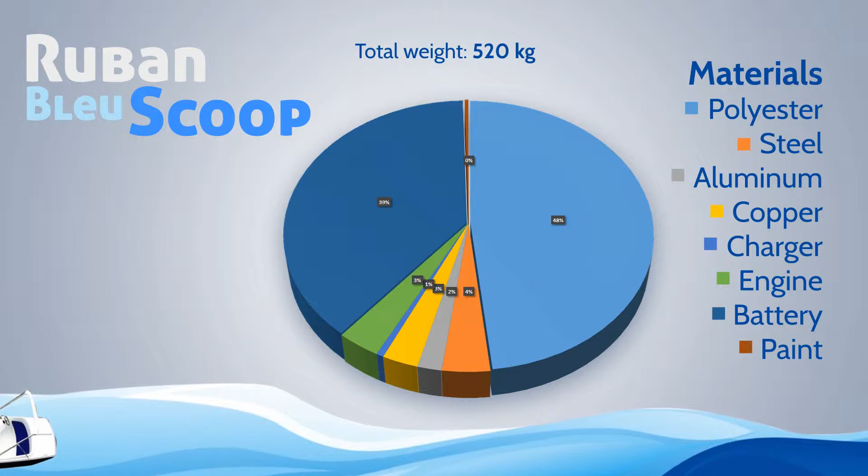Okay, we hope you understand the principle now. We'll come back to it later. Design an environmentally sustainable, motorized, water recreation product / offering using layered object manufacturing or 3D printing as the main production method. So, let's start with our vision.

We want the boat to be suitable for inland waterways. It must have a low EVR. Must be suitable for a rental service. Use of natural materials. Sustainable energy. Also, the production method needs to be sustainable. And the design should be most advanced, yet acceptable.

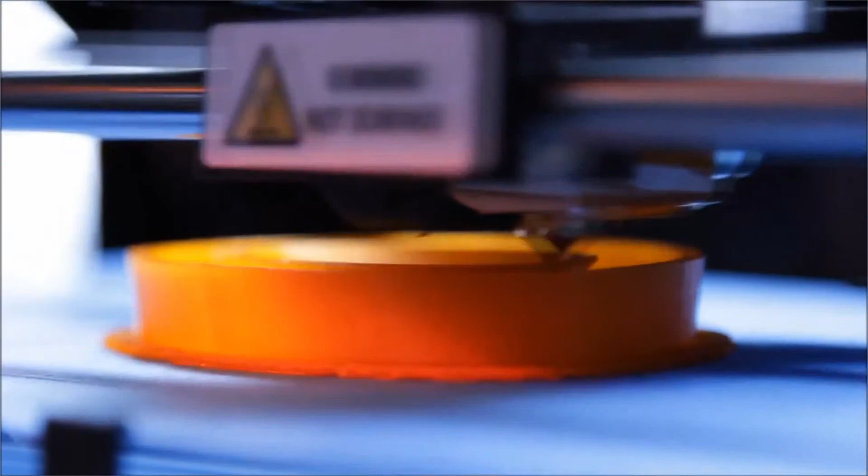Additive manufacturing. Most of you already heard about it. It includes several different production methods that allow three-dimensional complex shapes to be manufactured. Objects are created layer by layer. This opens up possibilities that are impossible to manufacture with traditional methods. As you can see in the movie, the shape is created layer by layer.

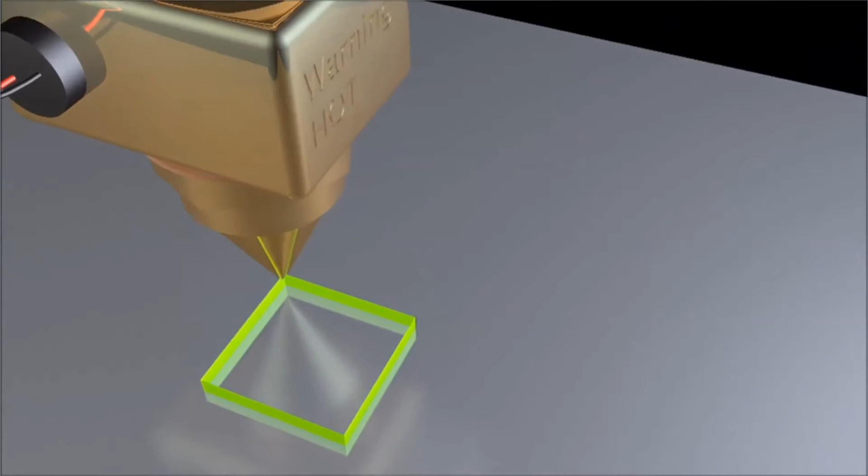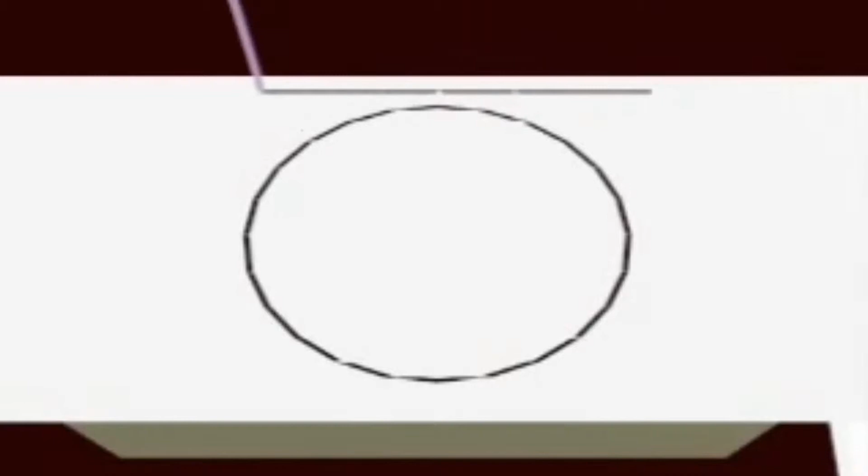The most well-known 3D printing method is fused deposition modeling, also known as FDM. A completely different form of additive manufacturing is layered object manufacturing, also known as LOM. Layers of certain material, for example wood or paper, are glued on top of each other and then cut into shape. In order to choose the right manufacturing process, the processes will battle.

May the lowest EVR win. In the red corner we have layered object manufacturing, and in the blue corner we have 3D printing. Fight! So we use the life cycle analysis in order to determine the eco-costs. We've looked at the materials, the production method, and the waste.

We have done this for 3 different 3D printable materials: ABS, PET, and TPS. As you can see, the highest eco-costs are in the production phase. This is because of the high energy requirements that are needed to melt the plastics.

For LOM, we have looked at 5 different types of wood: bamboo, European oak, birch, hickory, and American oak. As you can see, the values of 3D printing are about 25 times as high as the values for LOM.

So we have a winner! 3D printing is knocked out. LOM wins. Okay, let's go back to the EVR model.

Now we know the eco-costs. We still need to know which type of wood has the highest value. For this, we made a survey. We asked people to rank the wood, without knowing the type of wood, from lowest to highest value. We will give you 5 seconds to do that for yourselves. Okay, the time starts now.

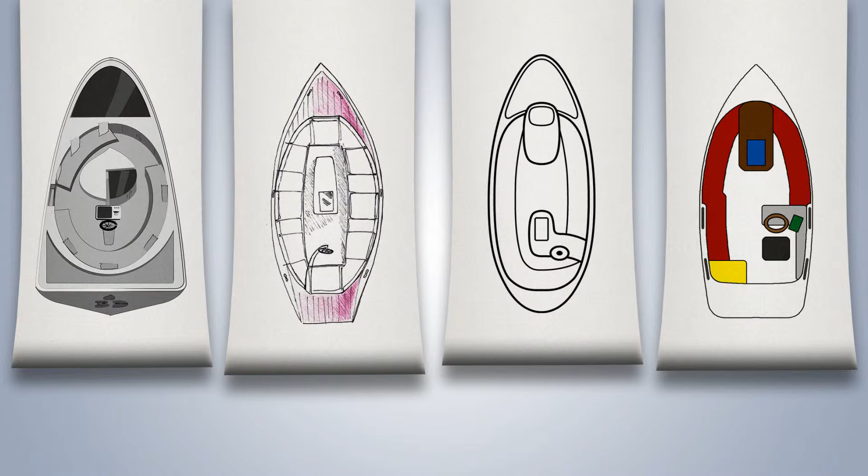Now the material is chosen, it is time for the boat design. The team members came with 4 individual concepts. By combining these concepts, the boat could be designed.

In order to decide the size, the team started to measure and lay out a top view design, until it could comfortably hold 6 to 7 passengers. The boat is 1.2 meters high, 5.5 meters long, and has a width of 2.4 meters.

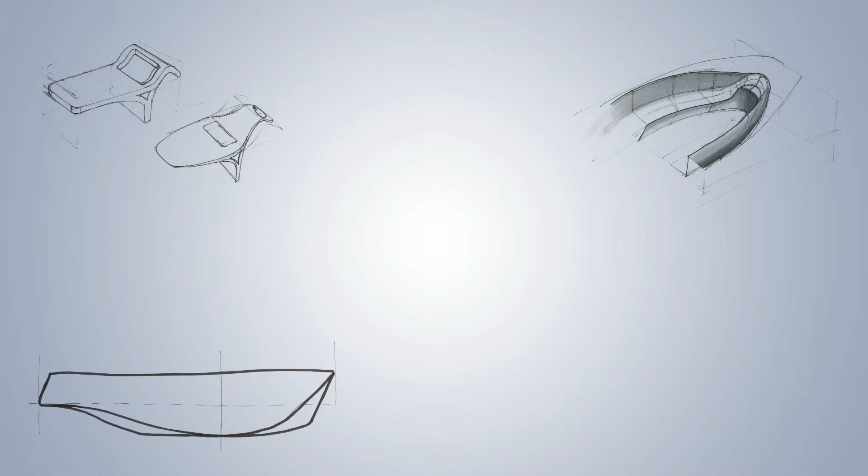When the final sizing was determined, the individual boat parts were designed. The table, the passenger and driver seats, the hull shape, the steering wheel, and the total boat shape were molded and shaped until everyone was satisfied and one final boat concept was given birth.

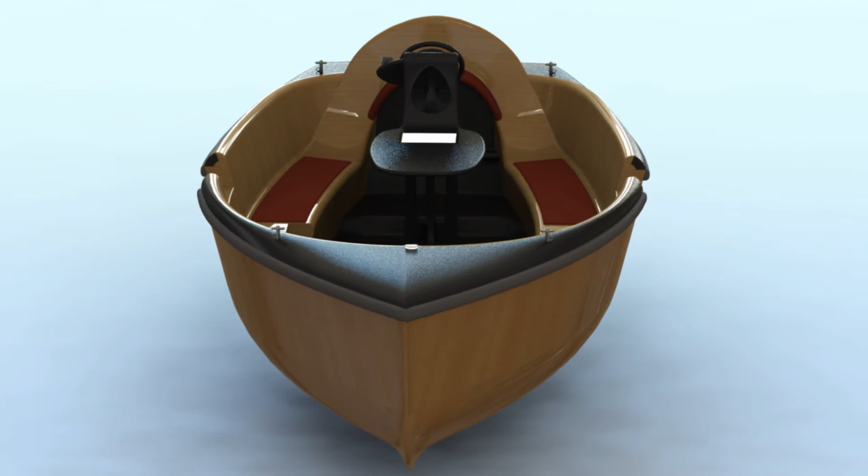The GPS on board will make sure you never get lost. Maybe you are still wondering what makes our boat better than the others.

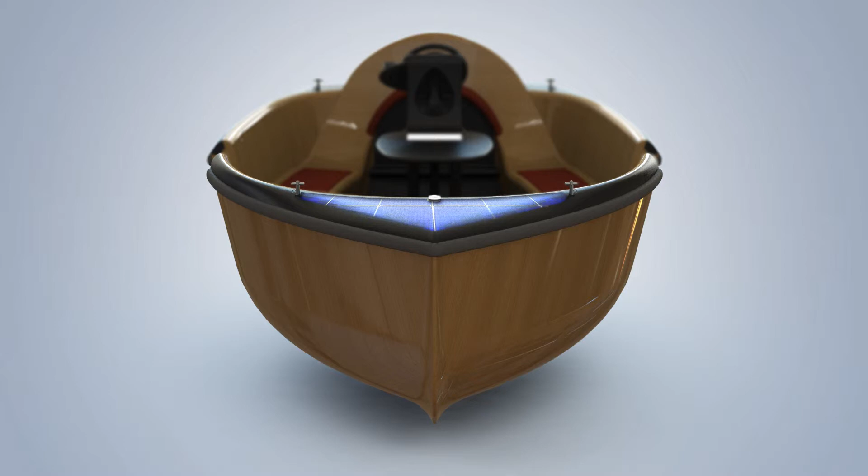For the value, we also did a survey. We asked what people are willing to pay for the boat. What would you pay? 10,000? 15,000? 20,000? These are just some values, but from the survey we found out that people are willing to pay this amount. This means that the total EVR of the boat is 0.1.

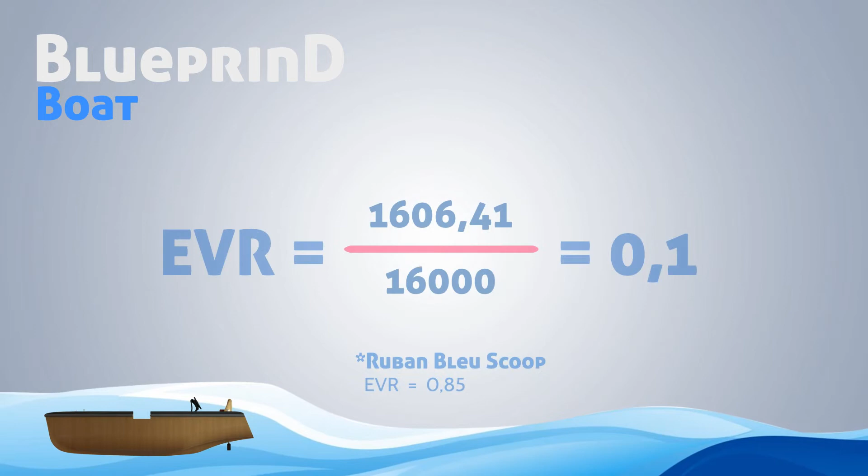We can definitely say that our mission is complete. We have developed a circular business model for the boat. The boats are not going to be rented or sold, but they will be leased.

Leasing the boats will have a big advantage for the customers and for ourselves. We handle all the maintenance of the boat, replace parts if needed, and after a certain amount of time, the boat will be replaced. The contract ensures that all boats return to us. Then they can either be refurbished, partially reused, or recycled if they completely reach the end of their life.

As we can see, our policy would make everyone happy: the inhabitants, the users of the boats, and ourselves.

We took you on a journey through the design of a beautiful, luxury, and interactive boat, which has very low eco-costs and a relatively high value. It pleases so many people at once. We already believe in blue. You too?